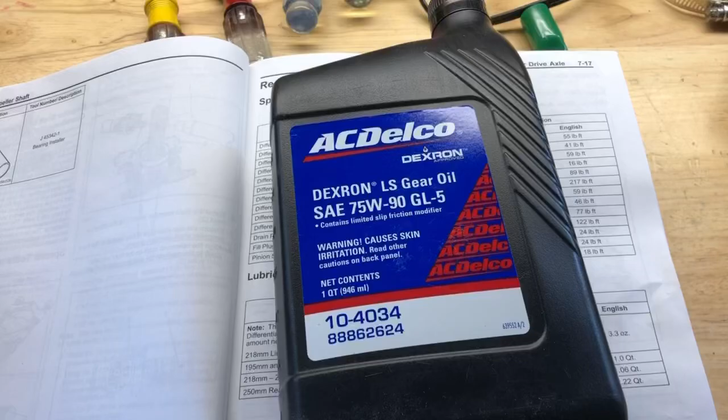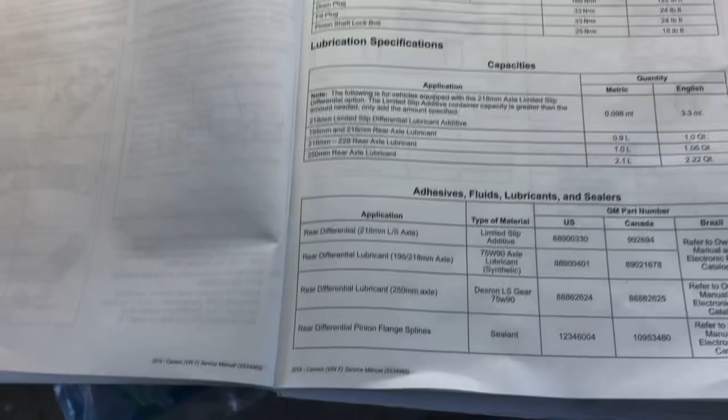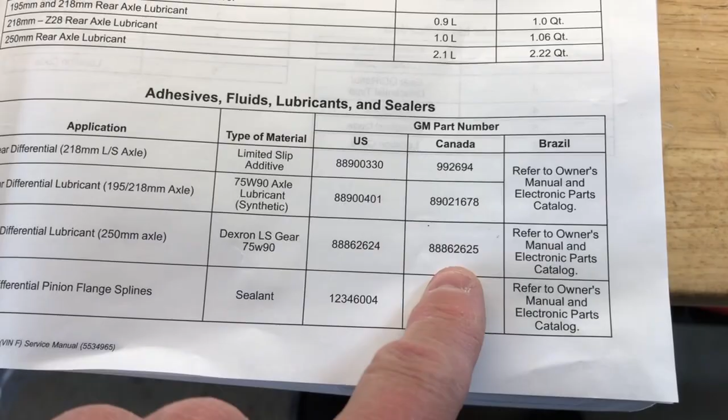I'm going to be changing the differential fluid in the ZL1 diff. This is what the service manual calls for that axle. That axle is a 250 millimeter axle. That's the part number on my bottle. That's the number you want if you're in Canada. Here's some identifying numbers.

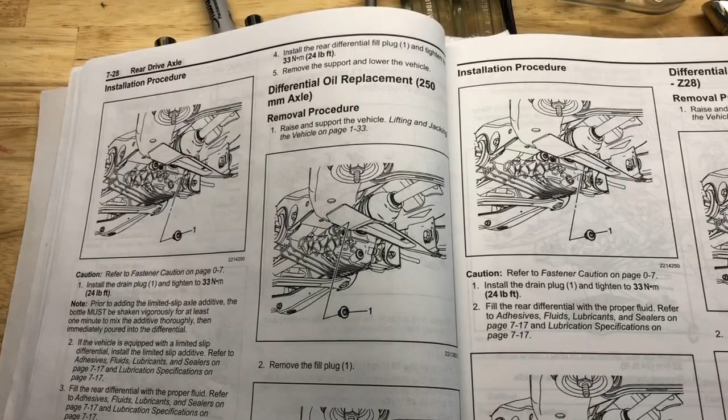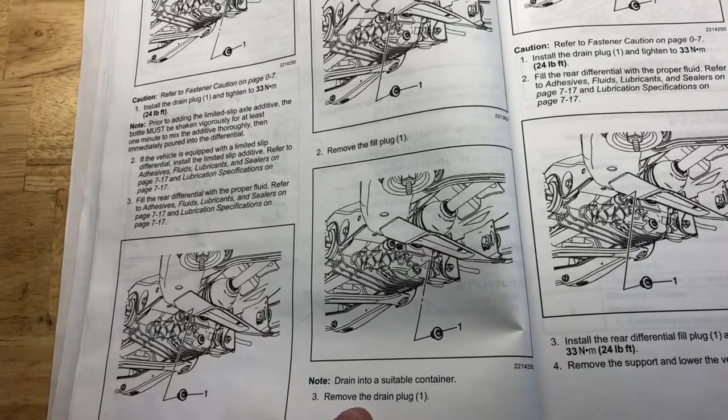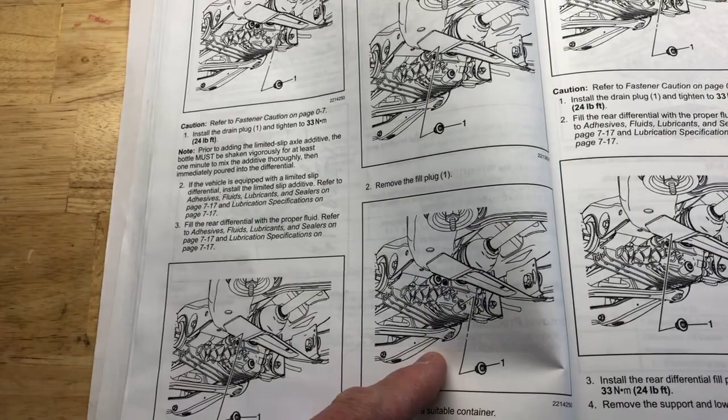The instructions seem simple enough. You raise and support the vehicle. Of course, it's got to be on a level surface. And it says to remove the fill plug and then remove the drain plug into a suitable container. The reason they tell you to remove the fill plug first is if you can't take that out and you've already drained the oil, you're screwed. So we'll get to the quantities here in a little bit.

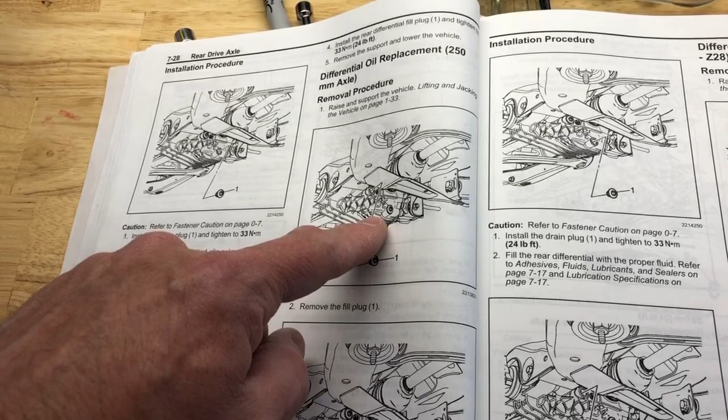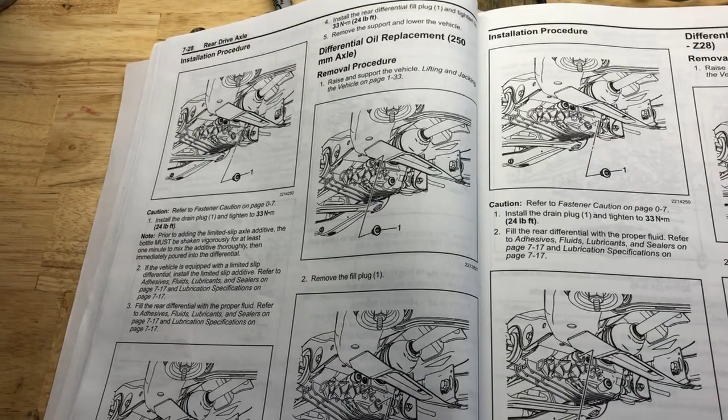This is on the driver's side of the differential. You can see the axle right there. Here's the pinion coming out to the drive line. So that's where you're going to find them, and they are 3/8 drive, so all they take is a ratchet to loosen them, and hopefully they're loose.

So this is how I'm doing my car. I just pulled it up on some wood, and I've got a little bit of a ledge in my driveway. Seems to have enough space underneath, minimally, to do this. I was going to put it up on the ramps and put a bunch of blocks under the rear wheels, but actually I just didn't have enough travel on the jack to make the car level. This way the car is still level. Let's take a look underneath.

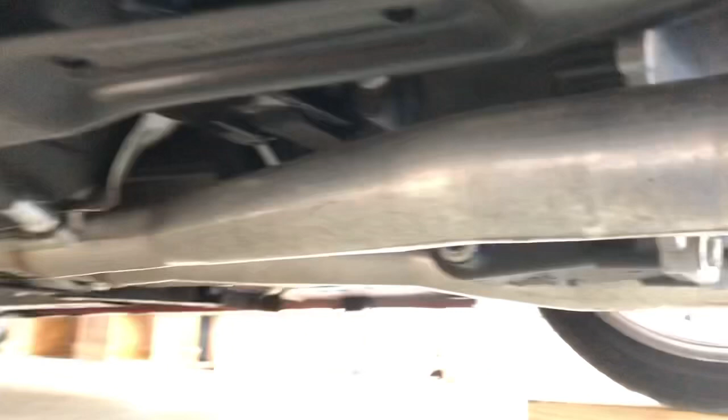Okay, so we're on the driver's side, and that is the drain plug. That's the front of the car. And that is the fill plug. You can see there's square drive. A 3/8 should fit on it pretty well. I don't know if I can get my oil pan under here. I should be. If not, I'll use something from the kitchen.

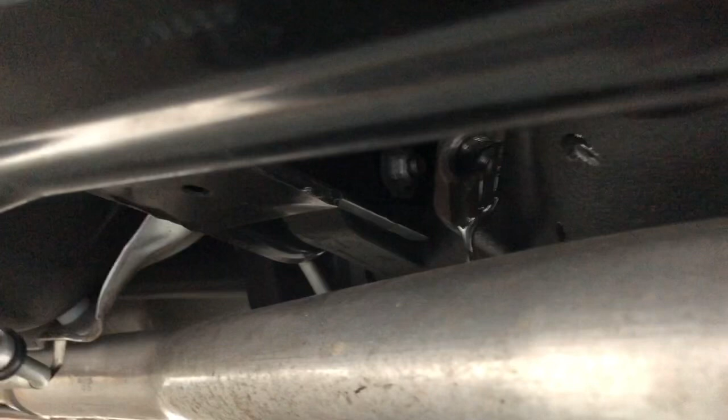I do want to mention that I was able to loosen the fill plug. So I'm just going to go ahead and take that out now. I did drive the car around to get it to normal operating temperature, which isn't very hot. Ooh, looks like there's some goop on there. I'll take a look at that in a minute. Oh, this stuff stinks. I hate the smell of gear oil. That's just coming out the fill hole.

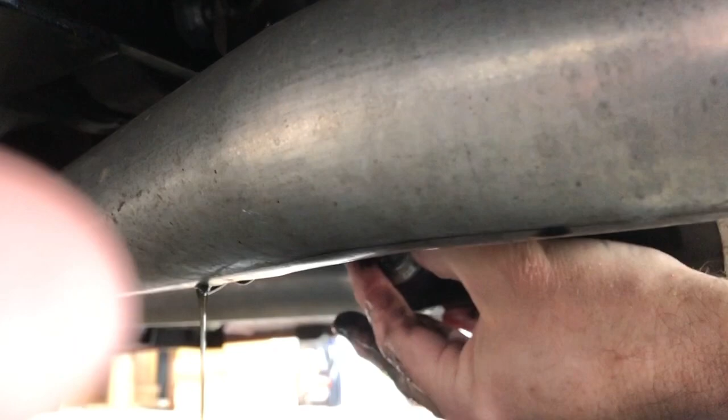I did want to mention that the car is in gear with the emergency brake on. And I didn't loosen that up enough by hand. I gotta turn the camera off. Okay, here we go. Hopefully this doesn't go shooting out too far. The exhaust isn't hot. The diff really isn't very hot either. I literally just pulled in about 10 minutes ago.

Ooh, yeah, that's time to replace that. So there's 16,000 miles on the car, but I know that Alan, the previous owner, had it changed at some point. I'd have to look at the service record. But it looks like it was due again. We're going to let that drip for a while.

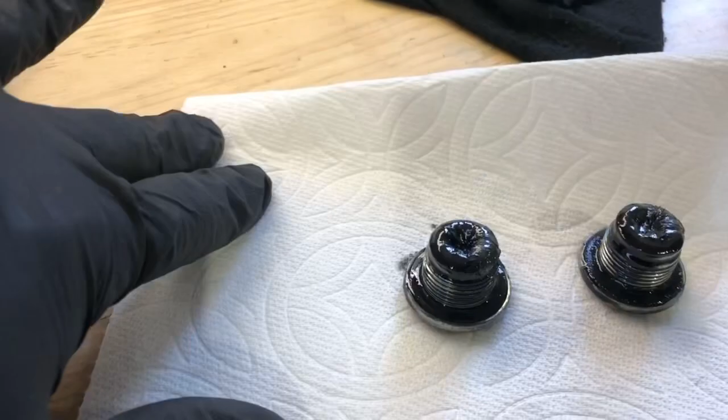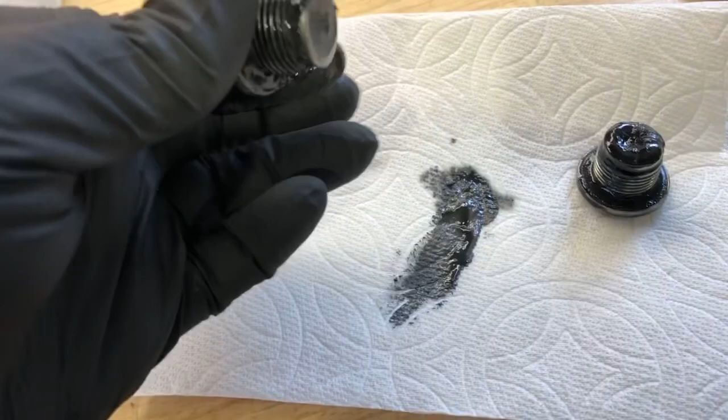Well, I was going to do an oil sample and send it to Peterson Tractor, the Cat dealer, for analysis, but I pretty much know it's going to come back no bueno, because I don't have a baseline with them. So this is all magnetic metal particles that stick to the magnet. Gonna clean those up. That's probably normal. You're gonna have some wear. There's no big chunks that I see, but we will inspect the oil.

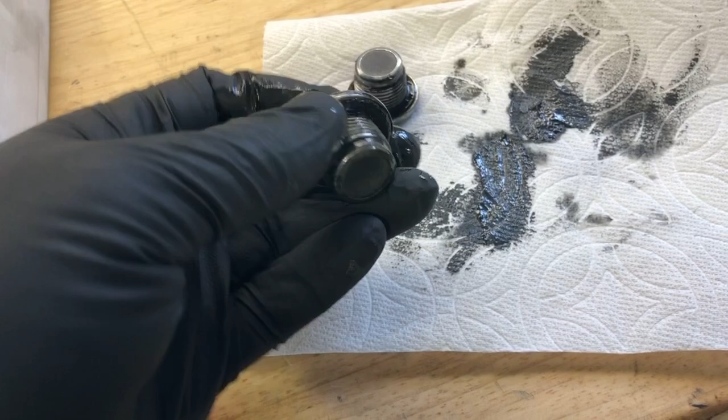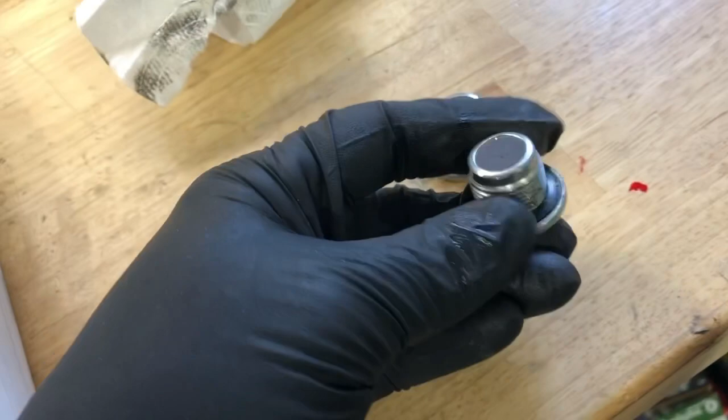Clean those up, get that all drained, and put them back in. These drain plugs have a magnet, but they also have a rubber seal that's embedded into it. Slippery sucker. You may want to avoid spraying these with brake clean. Might not be good for that rubber. I don't know what kind of rubber it is. It's probably nitrile, but I just wiped them off good. And these are steel going into a cast iron housing.

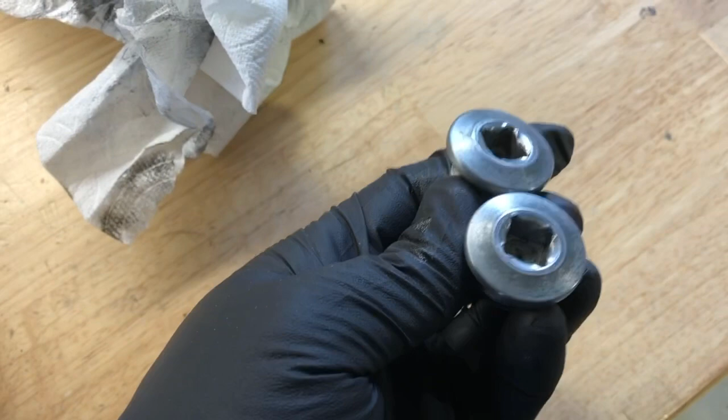That's the ZL1. The SS, with the aluminum housing, you may want to consider a little bit of anti-seize, and I mean very little. You don't want any of that in your oil. Probably not going to be good for the limited slip. Just enough to keep it from reacting dissimilar metals, steel with aluminum. I don't know if these might be stainless. If they're stainless, it would be okay. I can't tell by looking. They're possibly stainless, but maybe not.

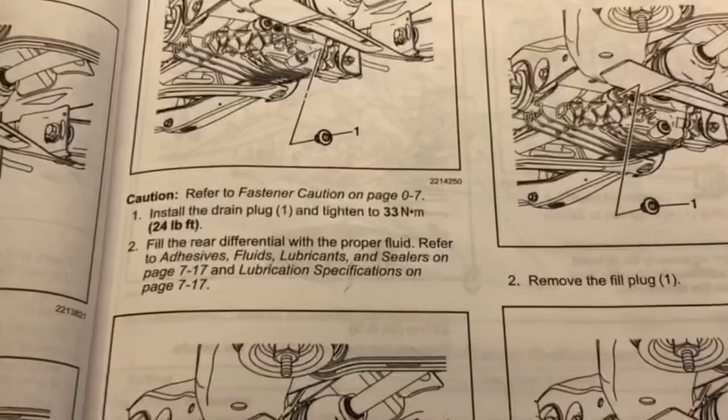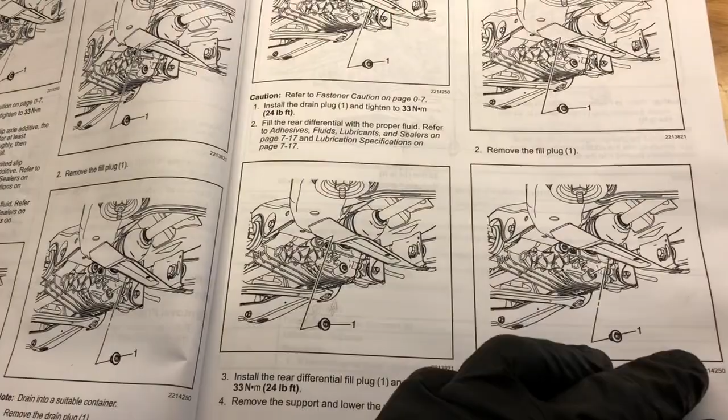Anyway, I'm going to put the bottom one back in, and then we're going to go ahead and fill it. Well, I figure I better mention it first before I get under there and forget about it. We will be tightening the fill and drain plug to 24 foot-pounds or 33 Newton meters, whichever one you guys want to use. All right, let's get to it. Clean that off. That way the rubber seal on the plug will have a nice clean surface.

Move this out of the way gently. I don't like splashing that crud all over. You could use an inch-pound wrench. There it is. And multiply 24 foot-pounds by 12 and get the inch-pounds. I think it would be 288 if I do my math in my head right. So, got oil on my book.

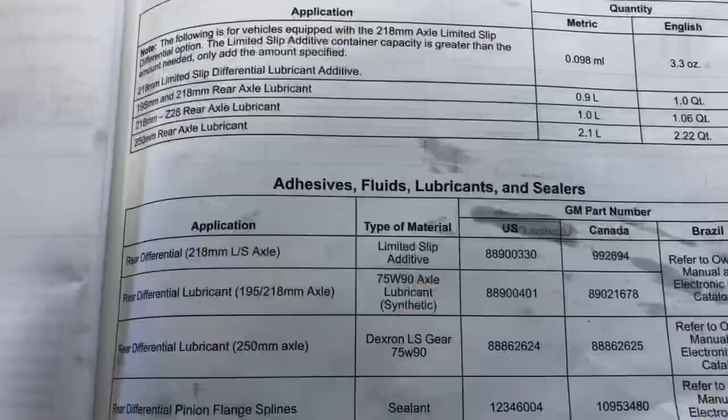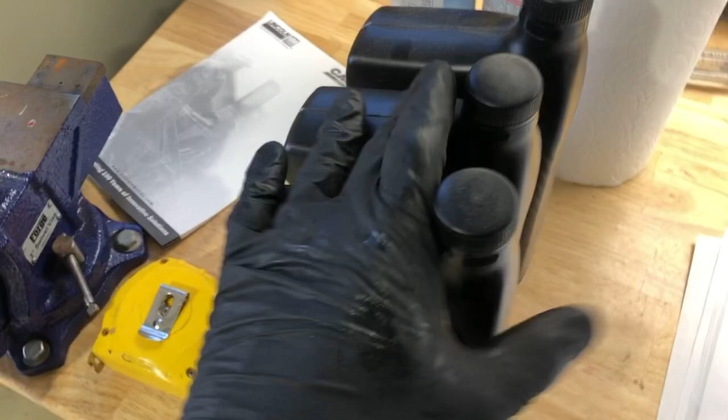So it's going to take 2.22 quarts for the ZL1 rear axle, and we already determined the part number, LS, and that's it. So this stuff is about $20 a quart. You might be able to find it for less. Some people may want to flush their rear end out and drain and refill. Completely up to you. I'm just going to drain and refill.

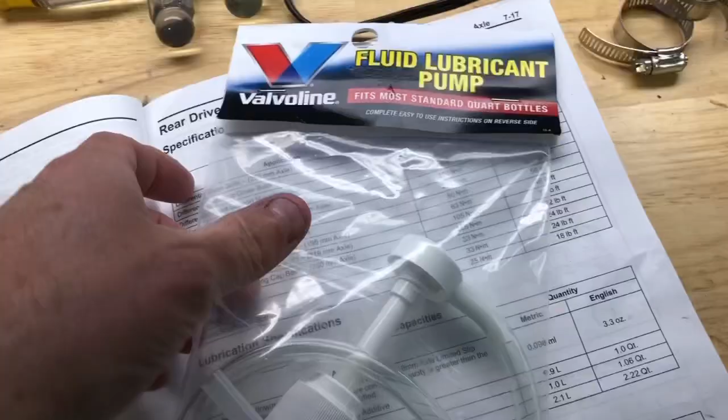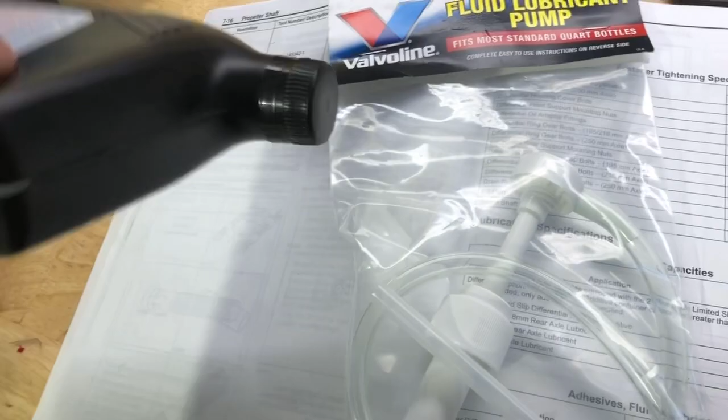I did warm up the fluid good to get all the particles in suspension right before I drained it. So hopefully I got the majority of the junk out. We'll just have to change more often. So let's get to filling it. This is what I got from our local Napa. It's supposed to fit these quart jugs. A little hand pump, make it a little easier to put the fluid in. Obviously you can't just pour it in, so let's try this out.

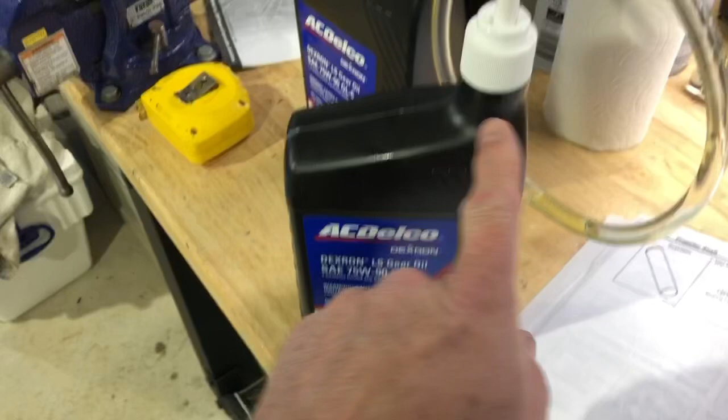Looks like we're gonna have to cut that to length. So we did have to trim that little piece. It's just coming in and kind of going down like that. So we have to keep that in mind when we gotta tilt it a little bit when we get toward the end of the bottle. So we have our fill tube going into the fill hole and the pump. And it's not too bad. It's pretty easy to just push down and it goes in.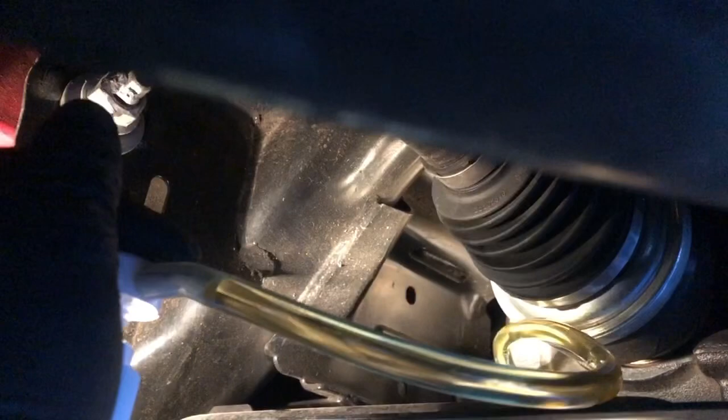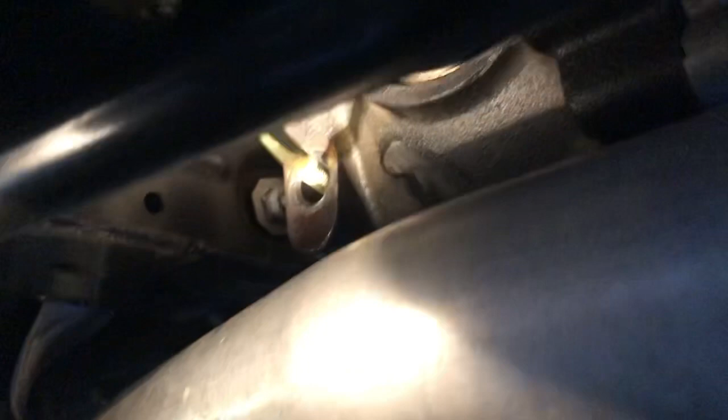I did put the drain pan underneath just in case this thing comes flying out, or once I get close to full, it might just start coming out the fill hole. So that's all there is to it. 2 1/4 quarts in the ZL1 diff, and we should be good. That's a little bit better view. It's kind of hard to do this one-handed. There we go. Pump's really easy. It's not hard or difficult, so it shouldn't be a problem for you.

Okay, bottle number 2. And this one went in pretty good. So to get the 1/4 of a quart, these are nice because it'll show you how much you're using. So we'll just pump in down to the 1/4 mark, and then we'll call it good. Oh, yeah. Pump away. That's all there is to it.

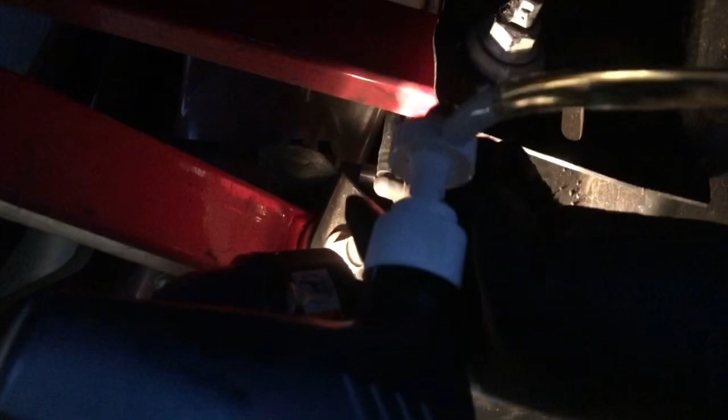All right, so this is a quart and 32 ounces to a quart, and there are ounce graduations on the side of the bottle. So we need 2 1/4 quarts in the rear diff, 2.22, which is 2 1/4 basically. So we are going to go down to the 26 ounce mark, which is right in between the 24 and the 28. So when we reach there, we should be good. Let's see how that goes.

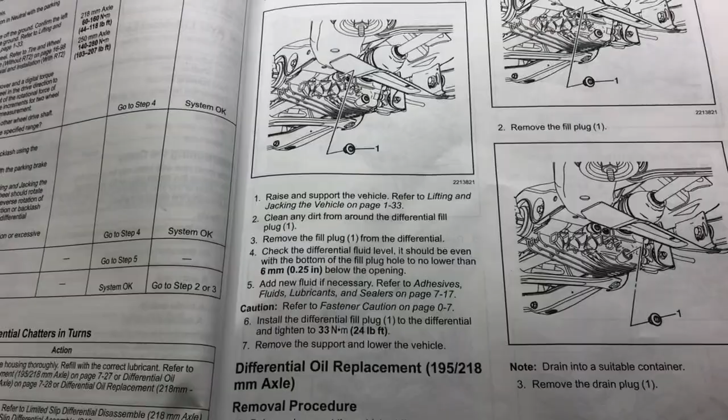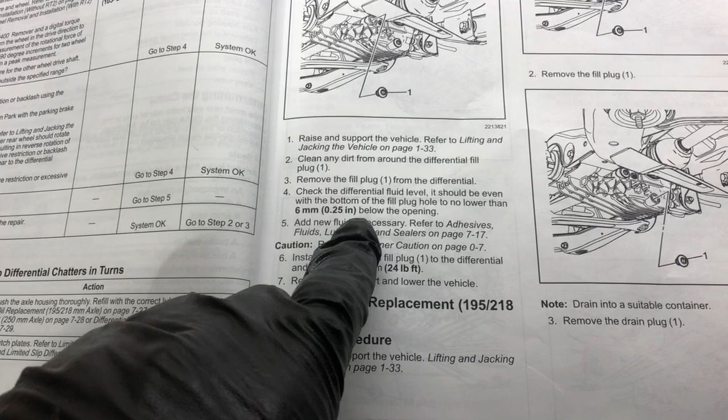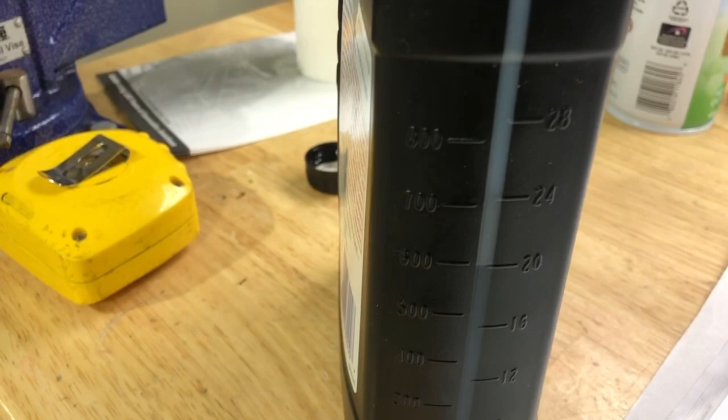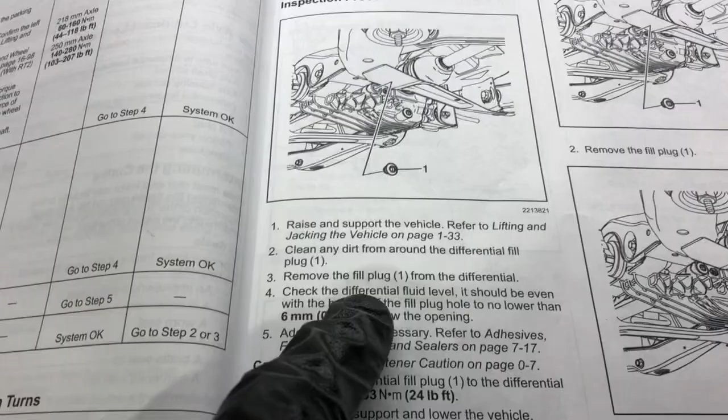So one interesting note, it says when checking the lubricant level, and this is for all of the differentials, that it should be even with the bottom of the fill plug hole and no lower than 6 millimeters below the opening. So I added some more fluid because it wasn't coming out the fill hole. So I actually got down to 20. So I used 12 ounces instead of 8 in order to get it to come out the fill hole. So I just let it come out the fill hole and dribble onto an absorbent pad, some paper towels,

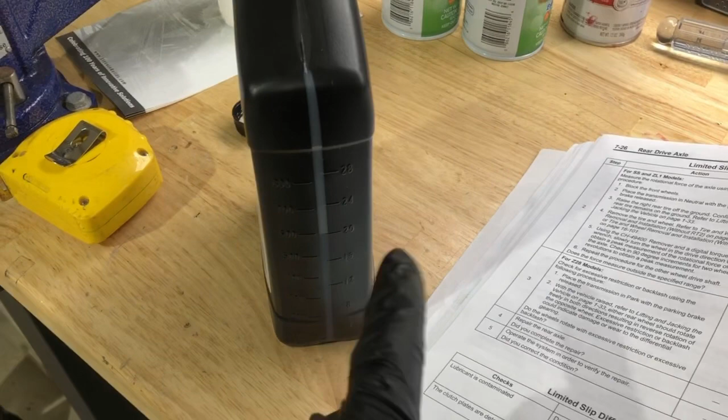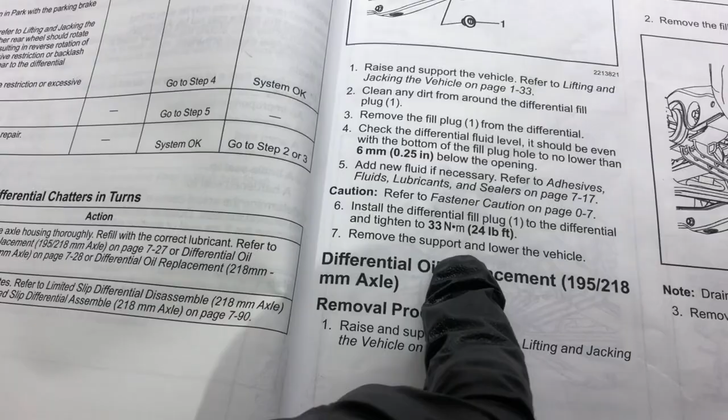and so yeah, I would not go by the 2 1/4 alone. Just make sure the car is on a level surface, it's nice and level, and fill it up to the fill hole, and you should be good, according to their instructions anyway. Okay, I guess that's it. All right, so we got that all buttoned up, 24 foot-pounds. I'm just gonna wipe down the exhaust. I'm sure it's gonna smoke a little bit because a little bit of the oil spilled on it.

And that's it, it's done. The only thing left to do is to drive the car and clean my phone because it's covered in gear oil, and properly dispose of this.